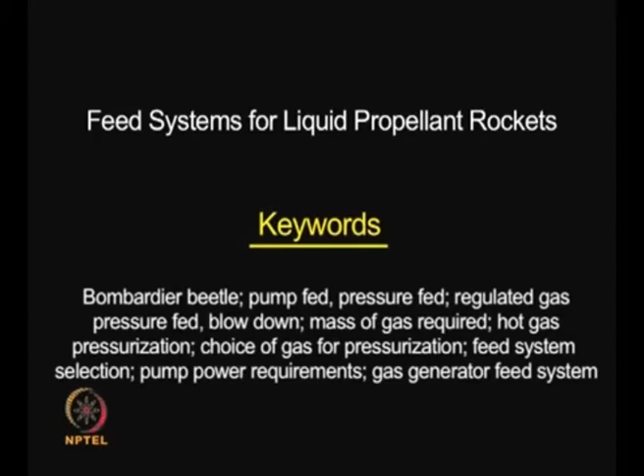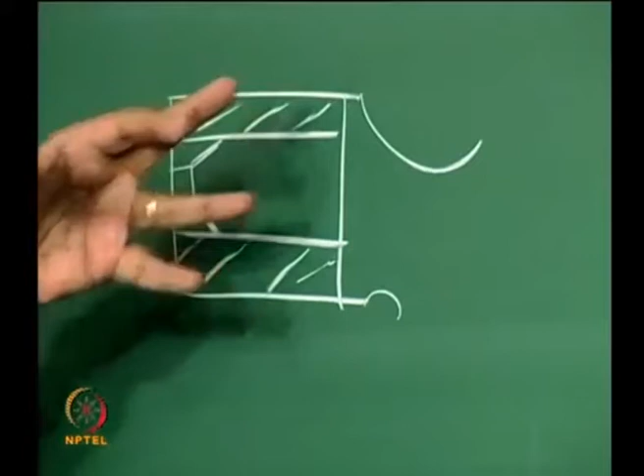When we discuss solid propellant rockets, we told ourselves, well, you have a solid propellant which burns, you have a flame near the surface, and once a solid propellant rocket begins to burn, it is impossible to extinguish it. This is because you have the grain in a case, and once you ignite it, there is no way you can quench it, it continues to burn. Of course, there are some works done to see under what conditions you can stop the burning, and by rapid depressurization you can quench it, but these have not reached a stage of application. Therefore, we say a solid propellant rocket, once it gets started, you cannot control it, it burns and burns, that is about it.

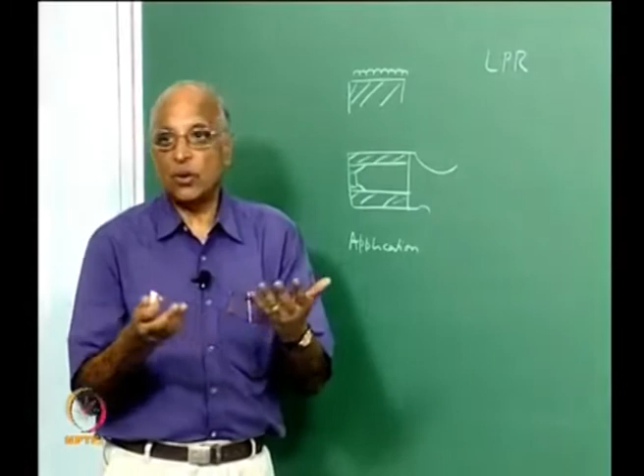Whereas when we talk of a liquid propellant rocket, we have considered different propellants. After all, I inject a propellant into it, I can always control it, and therefore there are certain advantages which a liquid propellant rocket will have. Let us examine these things, but to get started with liquid propellant rockets, I thought let us go ahead and look at nature.

We did examine, when we considered the theory of rocket propulsion, a small insect known as the bombardier beetle. This particular insect is smallish, maybe a centimeter to 2 centimeters or so, and it is somewhat heavy, and we find it all the time at all places. It is sort of unwieldy, it cannot fly that rapidly, and therefore it is always attacked by insects, and also it is harmless, it does not bite, it cannot fly much, we just pick it up on a piece of paper and throw it out whenever it comes. Some articles have come out on this bombardier beetle in the last 10 to 15 years, and one such article came in the Proceedings of the US National Academy of Sciences in 1997, volume 94, running over 5 pages from 1692 to 1697. The beauty of this is we must be familiar with what happens around us.

This particular bombardier beetle is attacked by ants, and what does the ant do? It stings us, and why do you feel a sting? It injects some formic acid into our system. Formic acid is something like carboxylic acid, and that is why you feel a sting, the same sting as when a bee stings us, because something is injected into us. In fact, the ant in Latin is known as formica because it bites us and injects the formic acid into us, and this same ant also pesters this beetle by stinging it. So what mechanism does this beetle have to escape from it or get rid of the ant?

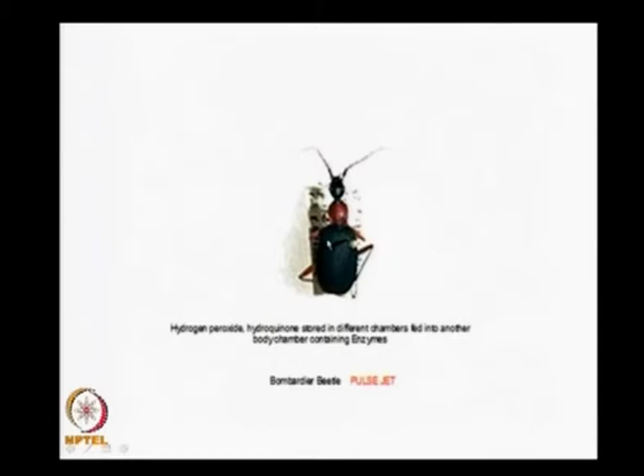It is a very unique way of evolution of species. All the species, if you look at Darwin's theory and all that, have come through some hierarchy, but this particular insect seems to be different from the other species, and it is very illustrative of something I will now tell you. Let us go ahead and see what really happens: in one stomach you create H2O2, hydrogen peroxide, and in the other chamber you create hydroquinone, which is a fuel.

When it wants to squirt hot gases out, it pushes this hydroquinone, this hydrogen peroxide, into this third chamber which is coated with enzyme, and it chemically reacts to form hot gases which it squirts out.

I was reminded of Leonardo da Vinci. He was the painter who lived in the late 15th century, and he made everything. He looked at birds flying, tried to construct an aeroplane, made bridges. Of course, he was a famous painter - you will remember the Mona Lisa painting.

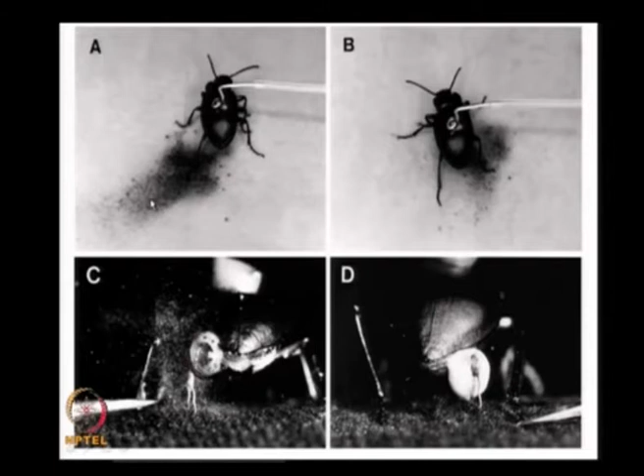And if you were to see what really happens, let us go back. This is again about squirting, this beetle. This is the prong or something like this. You are making it squirt out in this direction, maybe making it squirt hot gases in this direction, and so on. If you look at what this beetle does, maybe a chamber containing oxidizer, a chamber containing fuel, and a third chamber in which it reacts and forms hot gases and squirts it out.

A liquid propellant rocket consists just of fuel in a tank, an oxidizer in a tank. You pump the fuel and the oxidizer into a chamber, and how do you pump it? You pump it at high velocities through an injector, maybe break it up into fine droplets, vaporize it - all happening in that third chamber - then combustion takes place and you expand through the nozzle. This injector, combustion chamber and nozzle together create thrust, also known as the thrust chamber. So a liquid propellant rocket is nothing very much different from the bombardier beetle which is there in nature.

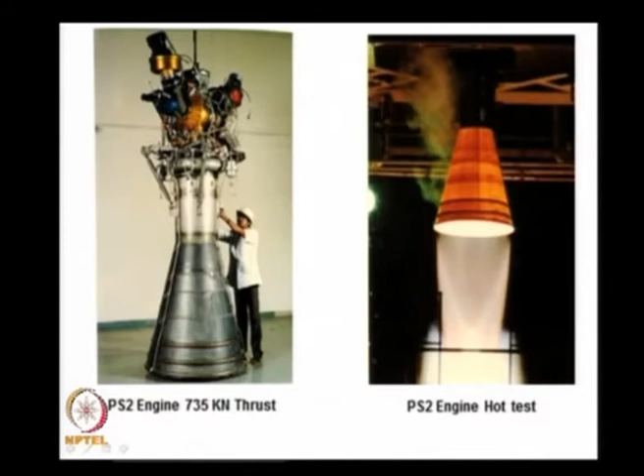I thought maybe we should look at a few more pictures of this. This is the engine I just showed you, a liquid propellant rocket engine, maybe much taller than this man over here. This is the combustion chamber, this is the pump, this is the nozzle, and this shows the rocket firing.

Let us take one more example. In this particular rocket which I just showed you, the oxidizer was N2O4 and the fuel was UDMH.

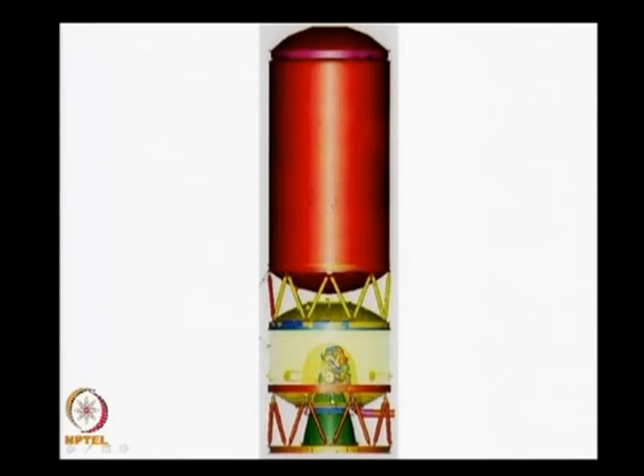The fuel could be liquid hydrogen, the oxidizer could be liquid oxygen. When I carry propellants like liquid oxygen and liquid hydrogen, liquid hydrogen is not very dense, so I have a huge tank for it, liquid oxygen in another, and a pump which pushes it into the combustion chamber where it burns. This is what a cryogenic liquid propellant rocket is like.

I will cover this particular rocket, known as the RL-10 engine. This was the first cryogenic engine developed, in the United States, during the 1960s.

So what do we infer from these few examples? In case of a liquid propellant rocket...

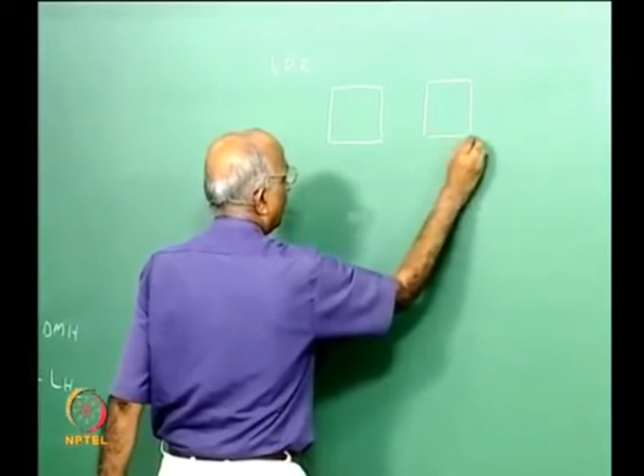All we need is something like a fuel tank, maybe an oxidizer tank, maybe a pump that takes a small incoming pressure and increases it to a high outgoing pressure—the incoming pressure should be even smaller, and the outgoing pressure much larger.

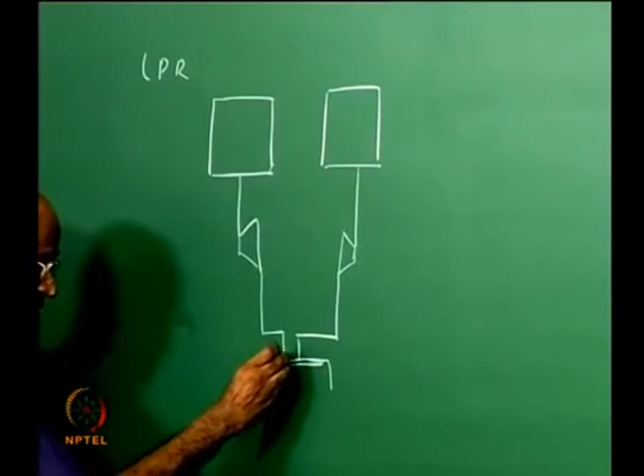I push it into a chamber, but I cannot just push it—I have to break it up into particulates. That means I need something like an injector, which allows the required quantity of propellants to come in and break into droplets. I have a chamber where the reaction takes place, and then this huge nozzle where I expand the gases. This becomes the liquid propellant rocket.

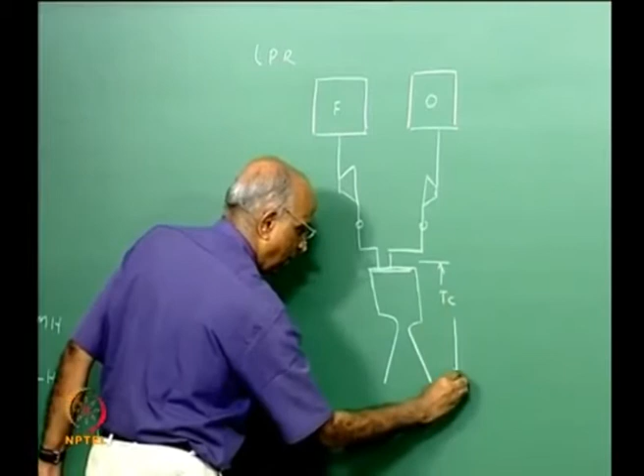Maybe I put some valves here to start the combustion and stop it whenever I want. Let's say the liquid fuel is here, the oxidizer here, and here is the thrust chamber where high pressure gases are formed and thrust begins to build up.

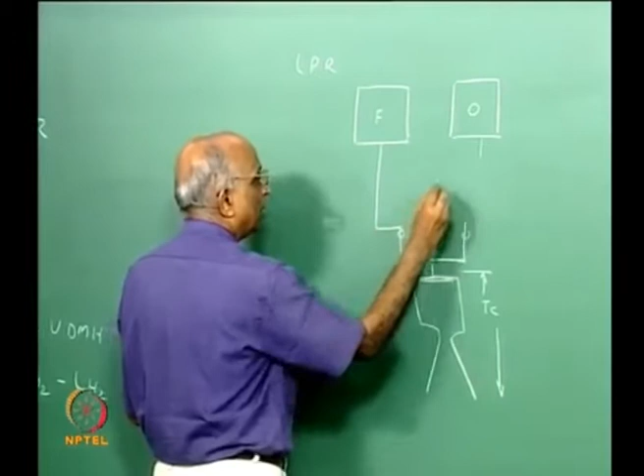Now you will immediately ask, why do I have to have pumps in the first place? After all, I have to supply the fuel—why not remove the pumps and supply it directly, like when we do an experiment using diesel combustion in an IC engine, with just an overhead tank on the wall connected directly to the engine?

Why not directly connect the fuel and oxidizer, and to push it through, have something like a gas bottle containing high pressure gases, with a pressure regulator over here to reduce the pressure and supply the gases at low pressure. In other words, I put a pressure regulator downstream of a high pressure source of gas.

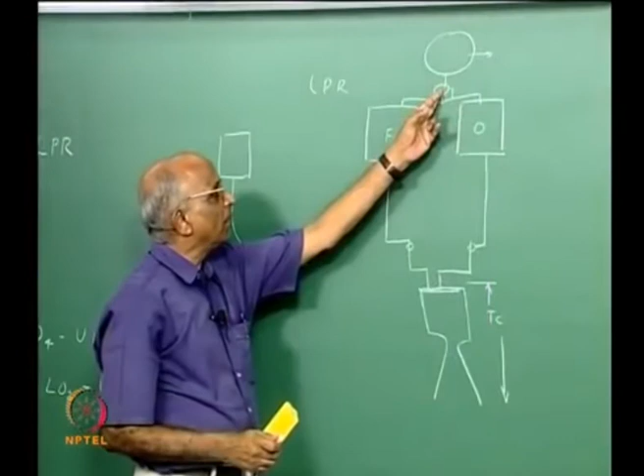Why do I have high pressure? Because then I can have a smaller gas bottle, and pressurize the fuel so that at high pressure I can send it into the chamber.

Therefore I need not always have a pump, but to understand whether pumps are really required, I need to do a little more exercise on this. Let us see what is required—let me replot this.

I tell myself I have something like a gas bottle which stores gas at high pressure, and a pressure regulator downstream. What does the pressure regulator do? From high pressure, maybe I store gas at 30 MPa, 300 to 400 bars, but I don't want such high pressure—I want much lower pressure, maybe 10 MPa or 1 MPa. So I put a pressure regulator which senses and reduces the pressure through a particular opening.

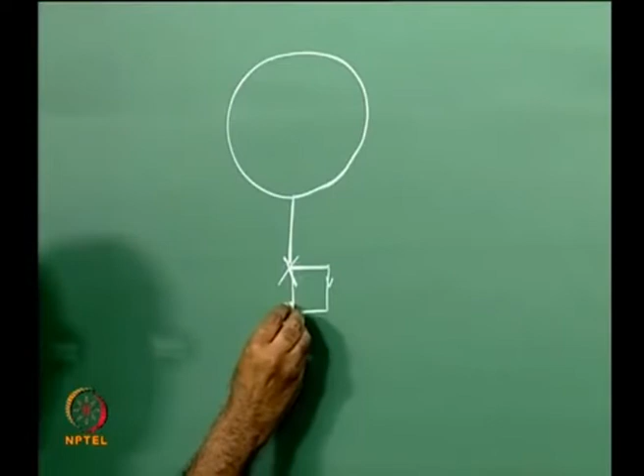It is a feedback control system, connected to sense the pressure, and then I connect this gas to the fuel tank and the oxidizer tank, which are full of propellants, and then bring it into the combustion chamber.

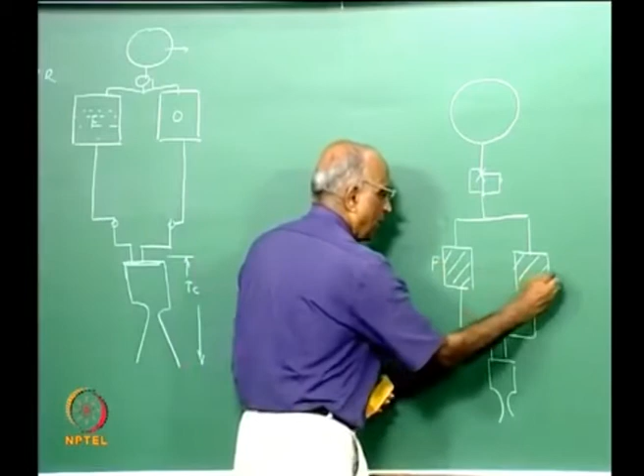What am I talking of? Having a high pressure gas bottle, I regulate the pressure to a lower value and push the fuel and oxidizer into the combustion chamber. This becomes something like using a cold gas, high pressure gas, and I call this a regulated gas pressure fed system.

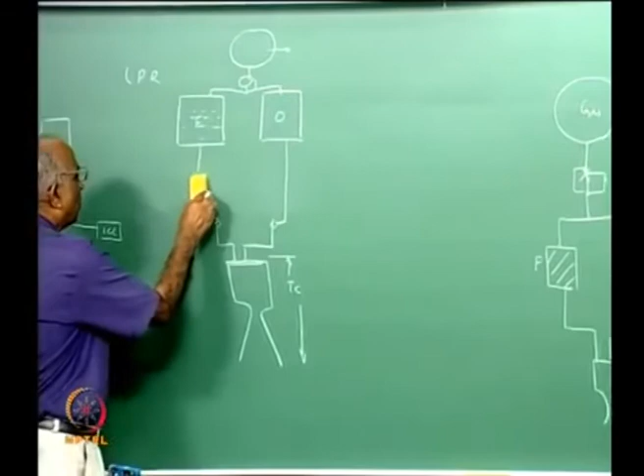That means I am interested in this. I started with a pump. Let us see under what conditions I would really require a pump, and under what conditions I can use a regulated pressure system. It is not always necessary to have a gas bottle and all that.

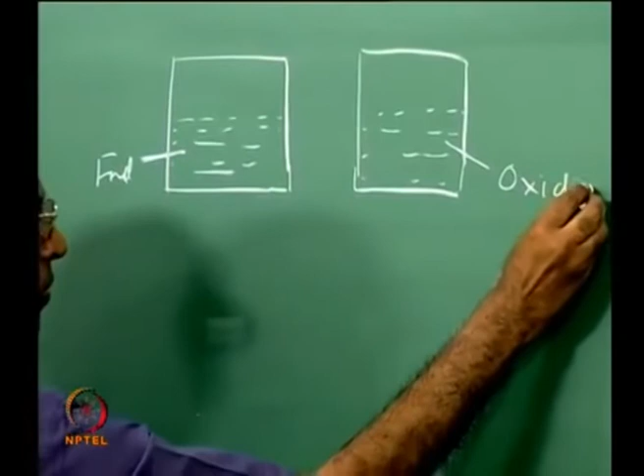I can think in terms of a different configuration wherein I take a tank, maybe a fuel tank, maybe an oxidizer tank. I don't fill the propellants fully in the tank. Let us say this is the fuel tank with liquid fuel, and I fill it with liquid oxidizer, and I directly bring it and supply it to the chamber. But how do I push it?

I fill gas over here, at maybe high pressure, and then I put a valve. I start this valve, immediately propellant flows. When I want to stop it, I close this valve. So the gas is contained in the tank itself and it blows the propellant into it. This is known as a blow down system.

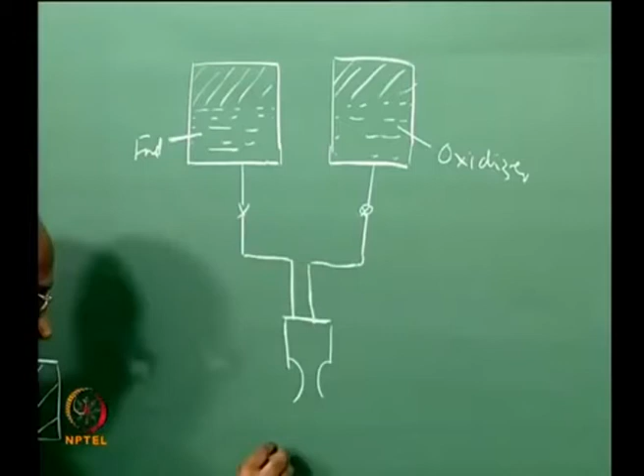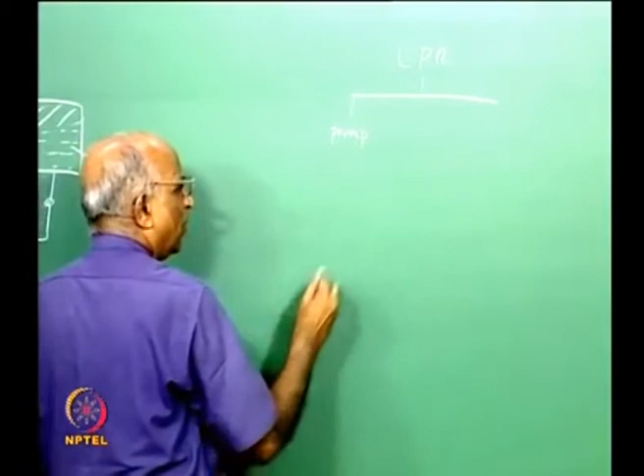What have I been talking of? In the case of liquid propellant rockets, we need to supply the propellants. We looked at a pump, but also told ourselves a cold gas at high pressure is possible.

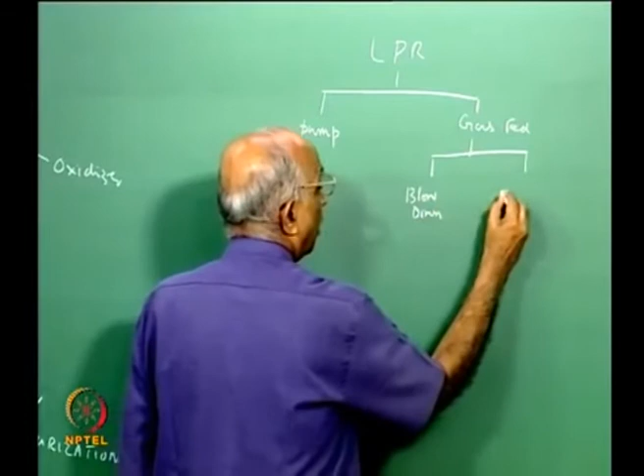This gas can be directly filled, and what happens when it blows down? The pressure keeps decreasing, and therefore the thrust keeps decreasing. Whereas if I give a regulated gas, I maintain constant pressure, and therefore I get constant thrust. So the gas fed system, high pressure gas fed, could either be in a blow down mode or in a regulated mode.

But we can't rule out that this is not required. For instance, if you have a satellite sitting in space, let us say the INSAT spacecraft - I will show you a small model of this satellite. It is something like a box structure, consisting of a box with solar sails, and when light falls on the solar sails, it creates pressure.

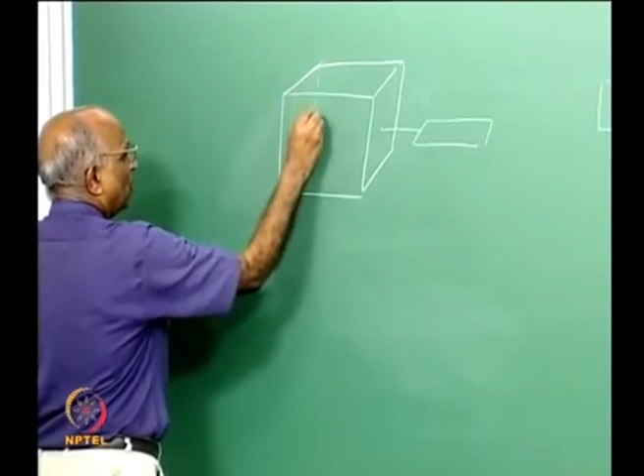We will study this method of propulsion towards the end of our classes. You have to balance the pressure from the sunlight falling on this, so you put something like a balance such that it does not get tilted. To control the attitude, we put small rockets on the different faces. How do you supply propellant to this?

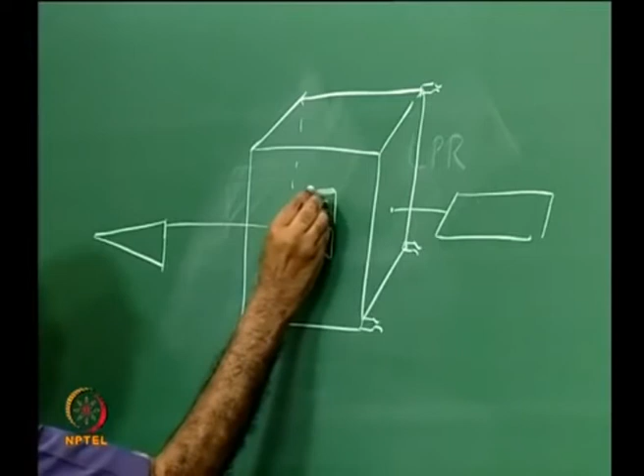Inside this structure, I put a propellant tank, an oxidizer tank. At the bottom of this oxidizer tank, I have a fuel tank, maybe with a common bulkhead - a single connection, this could be fuel, this could be oxidizer. I could put gas pressure connected through lines to this rocket, this rocket, and so on. Whenever I want this rocket, I open the valve and it fires.

This is the model I brought of this blow down mode, and this is how the INSAT spacecraft looks. This is the central box, inside which there is a chamber with the fuel tank and oxidizer tank, and these red knobs correspond to the thrusters, liquid propellant rockets. Whenever you want the rocket fired, you open the valve - the tank is already pressurized - and the liquid fuel and oxidizer flow into these thrusters and generate thrust. That is how you control it, and that is how liquid propellant rockets are used in spacecraft too.

But there is a problem.

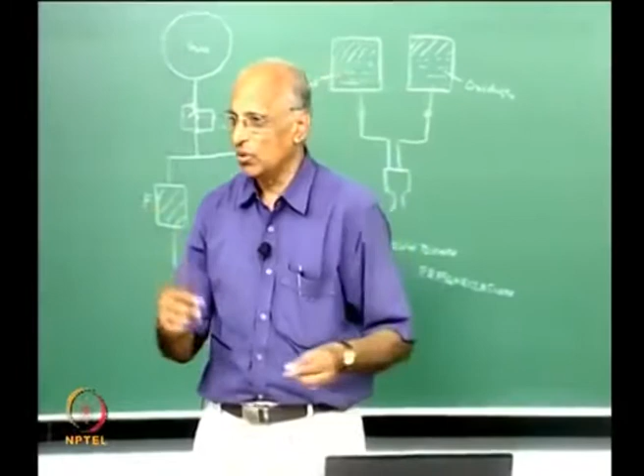Whenever I have fuel and oxidizer and a spacecraft is revolving around at a constant velocity, we told ourselves that in this frame of reference, it has a centrifugal force which is balanced by gravity. Therefore, there is no weight for this and it creates new problems. We have to see under weightlessness how do we supply the propellant. This also maybe we will take up after some time.

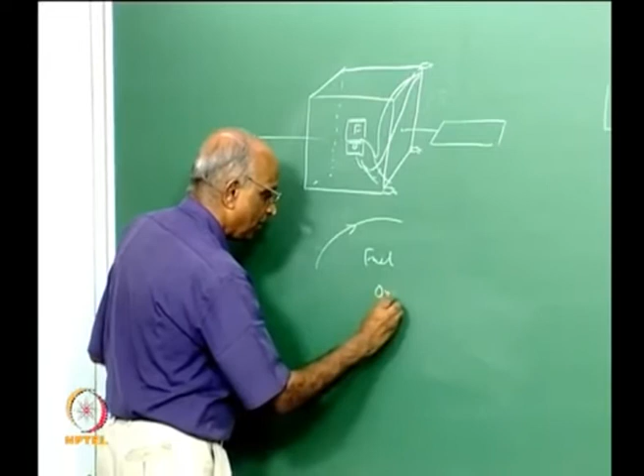This also requires that you have to supply fuel and oxidizer when they are in a state of weightlessness. That means if I put a propellant in a tank, the propellant may sit on top, it may not really come at the bottom, and when I pressurize it with a gas, the gas may come out but the liquid may not come out. Supplying propellants when in a state of weightlessness is again going to be a problem. Maybe we will take a look at it later.

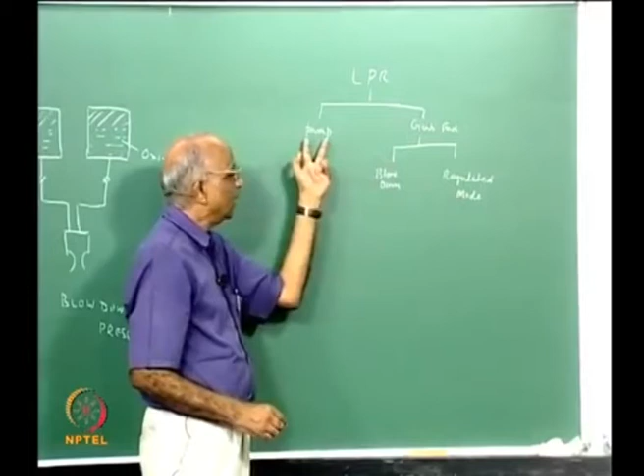Right now let us take a look at what constitutes a gas fed system, which could either be blow down mode or regulated mode, and then let us come back to the pump. Let us see if in between these two anything else is also there. To be able to do this, let us first try to find out how much high pressure gas is required.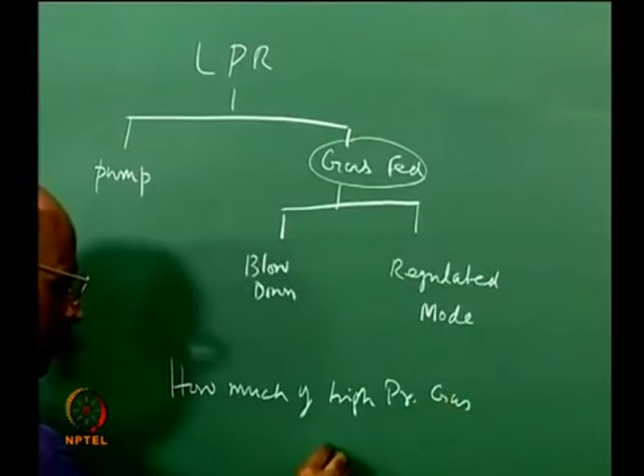First thing, we have to supply the propellants. I know once I give the thrust, I know what must be the mass flow rate of propellants. How do I calculate it out? Let us refresh ourselves again.

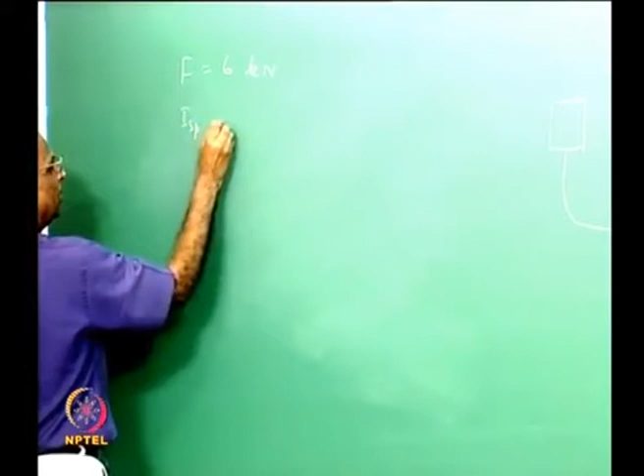Suppose the thrust of the rocket, as an example, is 6 kilonewton. Let us say the specific impulse of the rocket is equal to 3000 Newton second per kg. Then I know the mass flow rate of total propellants, fuel and oxidizer, is equal to 6000 Newton divided by 3000, which is equal to something like 2 kg per second.

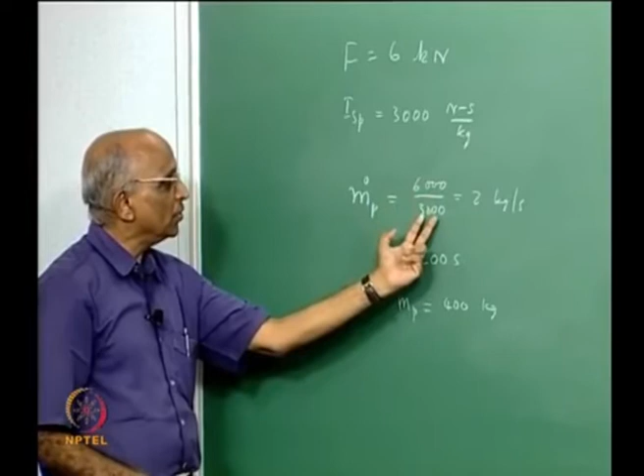To be able to supply this 2 kg per second, maybe the rocket has to fire for 200 seconds, let us take a small firing rocket for a small time of firing, say 200 seconds. Then I need to supply a total mass of something like 400 kg during the 200 seconds. We talk of 6 kilonewton, 6000 Newton, this is 3000 Newton second per kg, giving 2 kg per second. This is the total mass of propellant which has to be exhausted.

I want to know how much gas is required, how much mass of gas. Do I require 1 kg, do I require 100 kg? Because if the gas requirement is large, well, the rocket cannot take off. Let us try to estimate it. And how do we estimate it? We again follow the same figure, but now let us simplify it.

Let us simplify this figure and say, well, I have gas pressure, and we also told ourselves that gas can be stored at fairly high pressures. Let us plot it out. I have a gas bottle. It contains, let us say, M0 kilograms of air or gas, whatever is required.

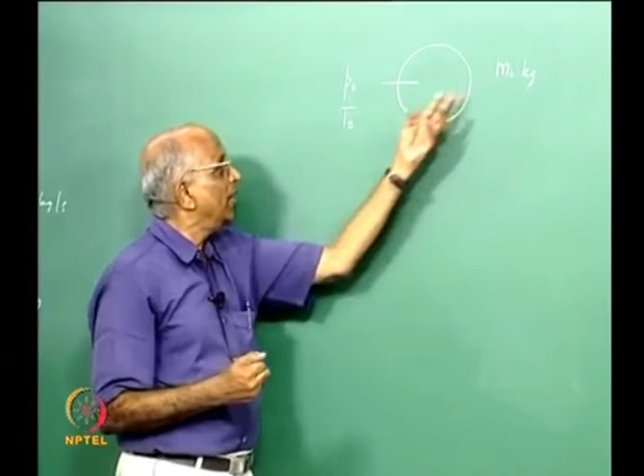I must also find out which gas will do my job well. Let us say it is at a high pressure P0 and at room temperature T0, because I do not want at this point to say I need a hot gas or a cold gas. Maybe when I derive the expression, it will become clear what type of gas is required and what must be the temperature of the gas.

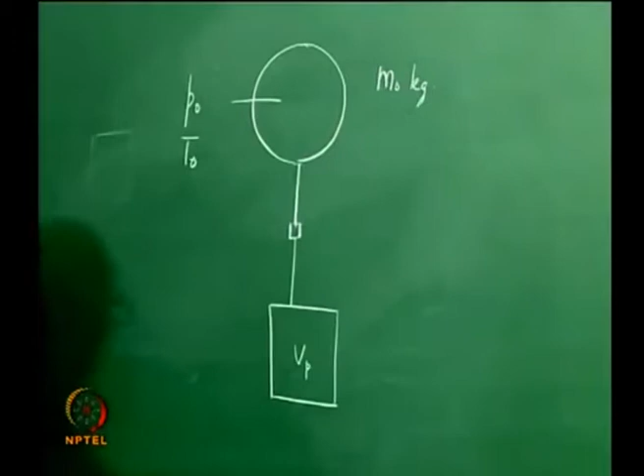What I do is from this high pressure source, I put a pressure regulator here and I reduce the pressure from the value of P0, and it must communicate to the two tanks I put together. Let us say the total volume of propellant is Vp, and this is what must be supplied to the thrust chamber over here. Let us say this is my surface of the thing, I need a pressure Pp over here, in Newton per meter square or Pascal, and I reduce the pressure from P0 to Pp in this type of regulator.

I reduce the pressure from P0 to the value Pp. Now my point is, how do I find out the value of M0 kg? I think it is a straightforward thermodynamic problem, but before doing this, we also need to put some other things down. Let us do a general problem.

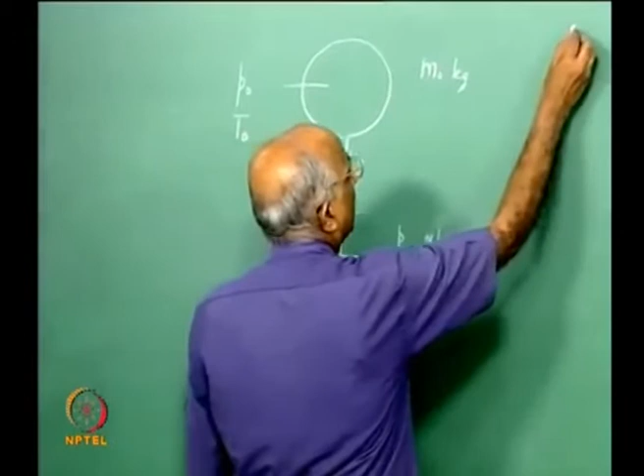Let us say at this point in time, when I start the work, I have the quantity of propellant liquid available which is Vp. When I finish my exercise, the quantity of gas available is going to be, since I use some gas for pressurization. At the end of operation, let us say MR is left, reduced so much kg, and the temperature here is TR, the pressure is PR, and at the end of it I have the same system, the same tank, all the propellants are expelled, it is now gas.

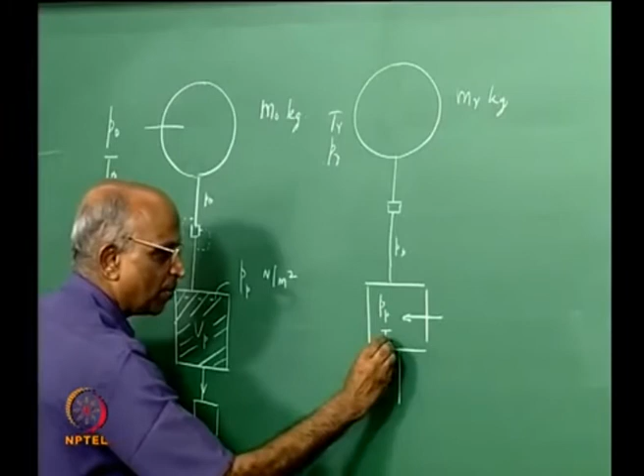Since I'm through the regulator, since I have reduced the pressure to Pp, when the propellant has just got out, it will be filled with gas at a pressure Pp, and the temperature, since it is slow depletion or fast depletion, it reaches the temperature of the propellant, the temperature will be Tp.

In other words, this is my initial condition. Let me make the figure complete. What I am telling is, I have exhausted or pushed out a volume of propellant Vp, and now after pushing it out, the gas has expanded and occupied this volume in addition to this volume, and this is my final condition.

I want to write an equation and determine the value of m0 kg that is required. How do I do this problem? Maybe we have done such problems in our thermodynamics subjects earlier. Let's just try to write an equation for it and try to determine the value of m0.

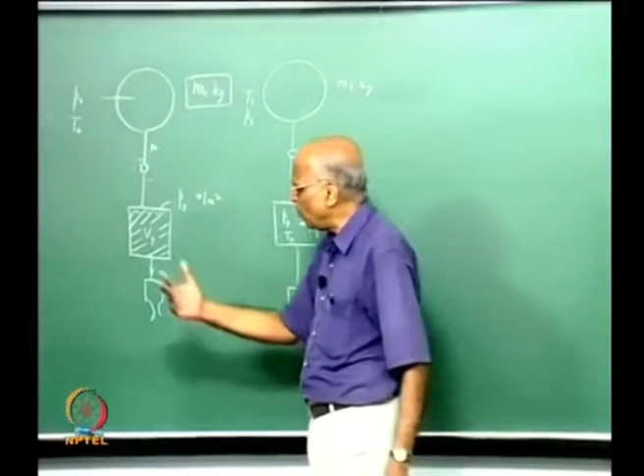I want to ask you, what is this which is happening? Let's say the system does not have any heat transfer. Let's make an assumption that the tanks are fairly insulated, the gas bottle is insulated, there is no heat transfer taking place, and therefore I ask myself, what is the work done by the gas in pushing out a volume Vp of the propellants? Let's calculate Vp for this particular problem.

Vp, if I take the density of the propellant to be same as water, density equal to 1000 kg per meter cube, that is the density of water, 1 gram per cc, and therefore the volume Vp is going to be 400 divided by 1000 meter cube, which is equal to 0.4 meter cube. In other words, for this rocket I have to get rid of 0.4 meter cube at a given value of pressure.

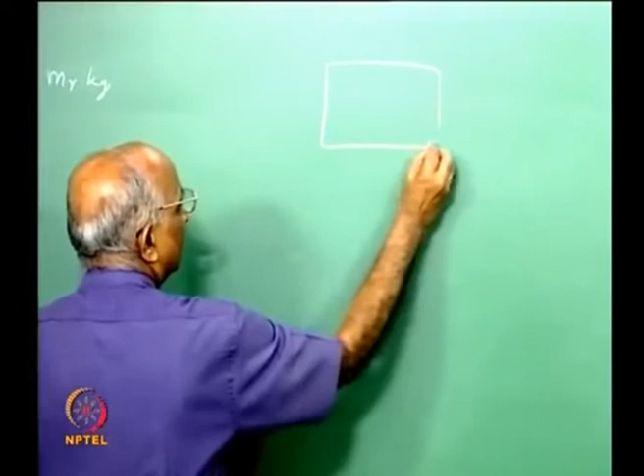Now, before I complete that problem, let's try to generate an expression and see what is the value. We tell ourselves, supposing I have a system like this. This is my initial state of my gas. The final state of my system is this, in which the gas has come from here and moved over here.

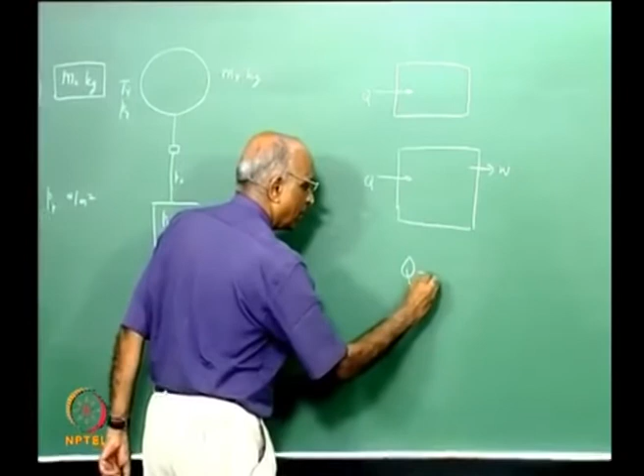I tell myself Q is adiabatic, well Q is there, the system does some work at the boundaries, then I can write Q minus W is equal to the change in internal energy for a system. Something is getting in, some work is being done, and the change is what is the internal energy. Therefore, now I take an adiabatic system, Q is 0, I need to find out the value of W, and I need to find out the value of change in internal energy.

Let us write the expressions for these two. The work done by the gas is in expelling the liquids, and therefore what is the value of work? Can we say, well, I have a constant pressure which is applied, the displacement is Vp, the work done is equal to Pp, the pressure, into volume of the liquid. Is it okay? What is the change in internal energy, final minus initial?

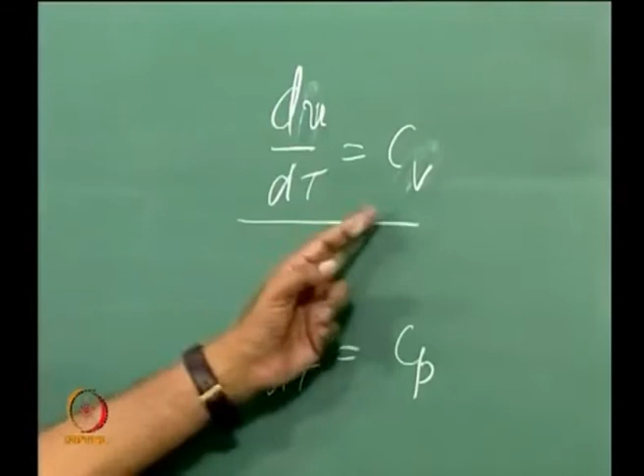Well, finally I am left with Mr of the gas. We know that du by dt, let us put it down, is equal to Cv, where U is the specific internal energy, and dH by dt is equal to Cp. Well, we are talking of internal energy, therefore U is equal to Cv T, and therefore du is equal to the final gas Mr which is available, into Cv into Tr. This is the final mass which is available. We say it is at a reduced pressure and a reduced temperature because it has expanded.

Some gas comes over here, plus I have gas which is there Mp into Cv into T, this is the final value of internal energy. I say that this volume of the lines or plumb lines are much smaller than this and this, therefore I neglect it. And what is the value of the initial internal energy? Minus, yes, you could tell me.

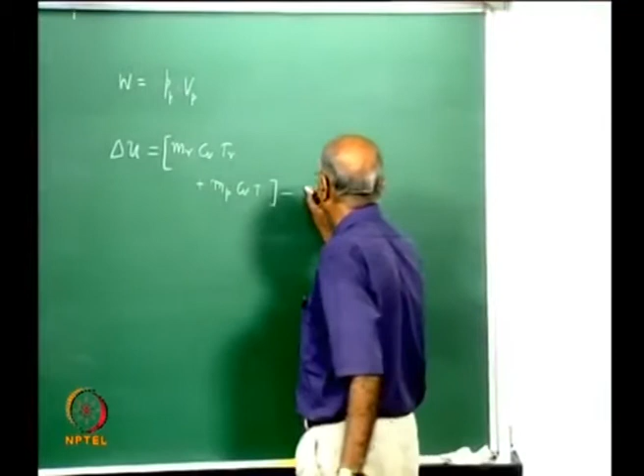What will be the initial value? Yes, m0 into Cv into initial temperature. I need to solve this equation and find this out, after knowing that minus W is equal to delta U. Let's find that value.

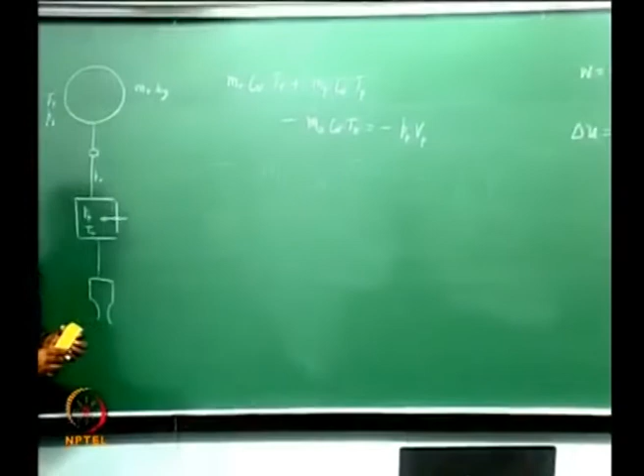Let me use this part of the board. What I have: MR into Cv into TR, plus MP into Cv into TP, the temperature of the final propellants should have been TP over here, minus M0 Cv into T0 is equal to minus W minus PP into VP over here. Is it all right? Q minus W is equal to the change in internal energy.

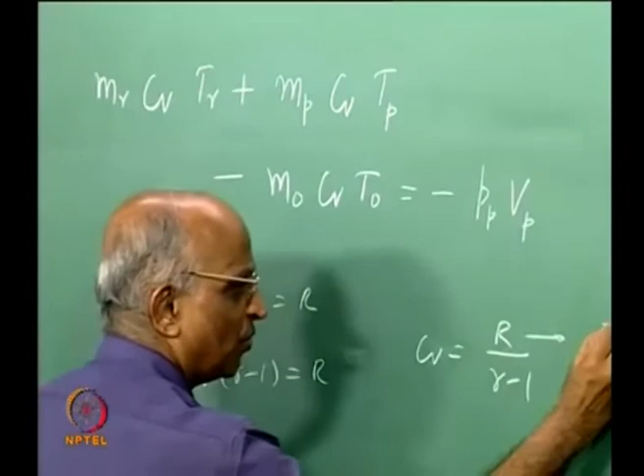I want to solve this. To be able to solve this, let us see what Cv is. We know Cp minus Cv is equal to R, and therefore Cv into gamma minus 1 is equal to R, or rather Cv is equal to specific gas constant divided by gamma minus 1, where R is the specific gas constant, has units of joule per kilogram Kelvin. And Cv therefore has units of again joule per kilogram Kelvin.

Now, what is the value of MR from the gas equation? We have PR into V0, that is the volume of the tank, is equal to MR into R into TR, or rather I can write the value of the mass, final mass after expansion has taken place in the tank, the mass of gas in the tank, is equal to PR into V0 divided by R into TR.

Is it all right? Similarly, I can write an expression for MP, and what will MP come out to be? MP should be equal to PP into VP divided by R into TP over here. I need to find the value of M0, therefore let us not touch this. Let us substitute these two values of MR, MP and the value of Cv in this expression and try to get the value of M0 coming out.

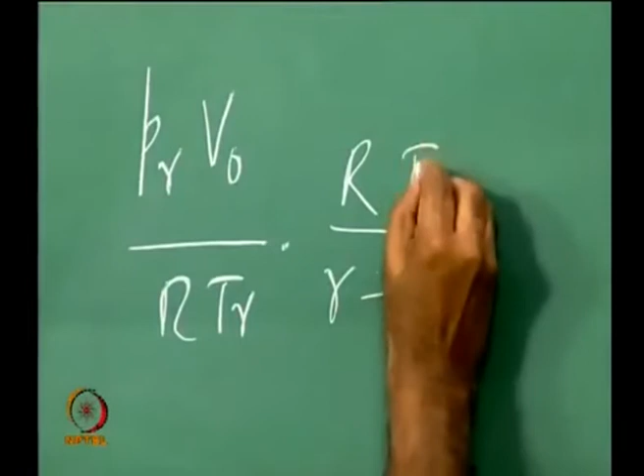Let us say MR is equal to PR into V0 divided by RTR, and Cv was equal to R divided by gamma minus 1, into TR, plus similarly I get PP VP by RTP into R, again I get the value of TP divided by gamma minus 1, minus I get the value of M0 into R divided by gamma minus 1 into the value of T0 over here, this is equal to minus PP into VP over here.

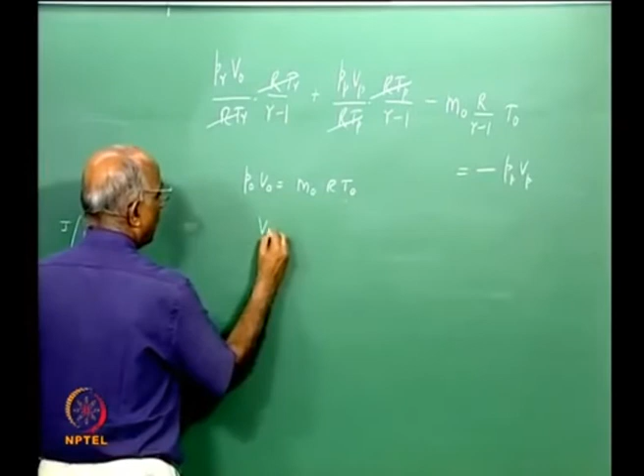Is it all right? Now I find that RTR cancels, RTP cancels, and now if I were to simplify, I don't know the value of volume because volume is related to mass. I can write P0 V0, that is the initial condition of gas before starting over here, is equal to M0 into RT0, or rather I can write the value of V0 as equal to M0 into R T0 by P0.

I substitute this expression, since volume is equal to mass into RT divided by P over here. I substitute it over here, take gamma minus 1 on the right hand side because all three terms have gamma minus 1, and therefore I get m0 into RT0 into PR by P0, plus PP into VP over here, minus I get m0 into RT0 divided by gamma minus 1, is equal to minus PP VP divided by gamma minus 1. This right hand side now reduces to minus gamma PP VP minus PP VP, plus, because minus and minus becomes plus, therefore immediately this and this get struck off, and now we are able to get an expression for m0.

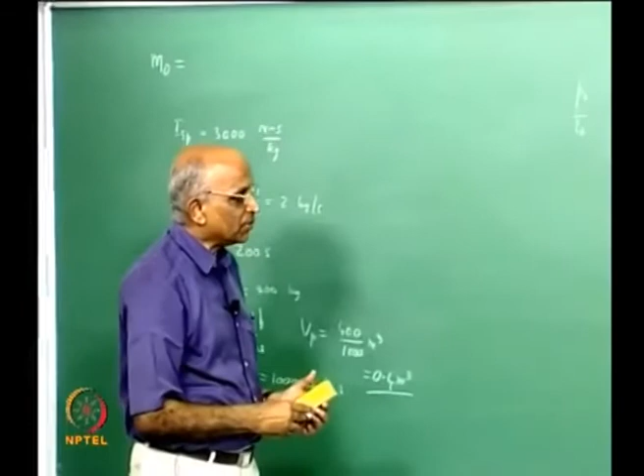Let us put it over here. Let us collect the similar terms. I get RT0 which will come at the denominator. I have in the numerator the value gamma on the right hand side. Therefore, what do we read? Gamma PP VP into 1 minus the value of PR by P0.

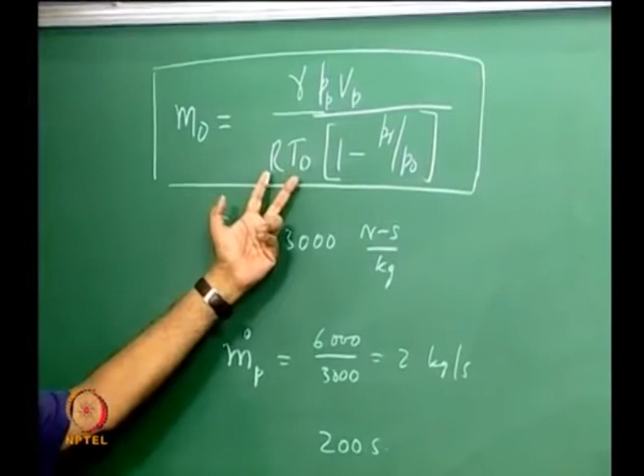Now I want to examine how much is this gas, what is this expression. Whenever we derive an expression, we must take a look and see under what conditions this holds good. Let's do that, I don't need this anymore.

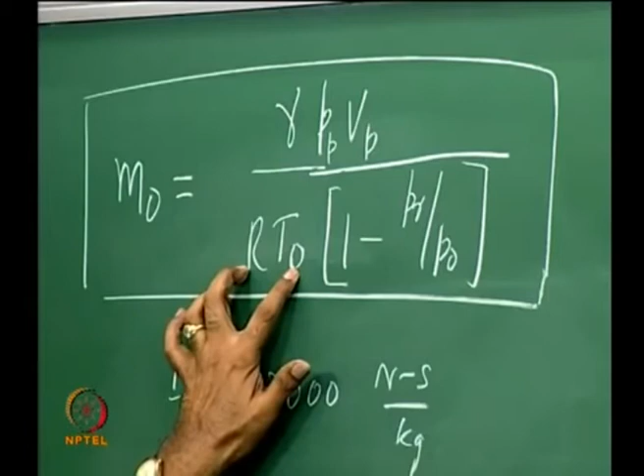Say the process had been isothermal, what gas would I require? M0 would equal PPVP by RT0, because it is isothermal. So when the gas is expanding, and irreversibly so, under isothermal expansion I get PPVP by RT0, with an amplification factor of 1 minus PR by P0 due to the expansion process. I'm writing the same thing, PPVP by RT0, because M equals PV by RT0 isothermal, and this is the multiplication factor.

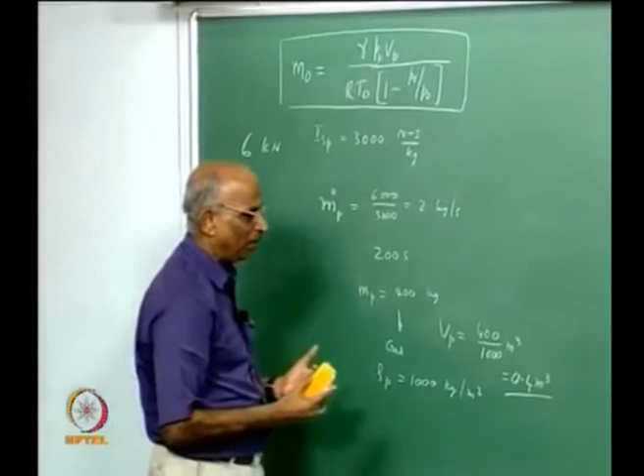Now I want to find out, for this engine which we said is 6 kilonewton, the mass of the gas required. Let's do one example and then extend it for different pressures and different thrust. Let's say in this case the volume equals 0.4 meter cube.

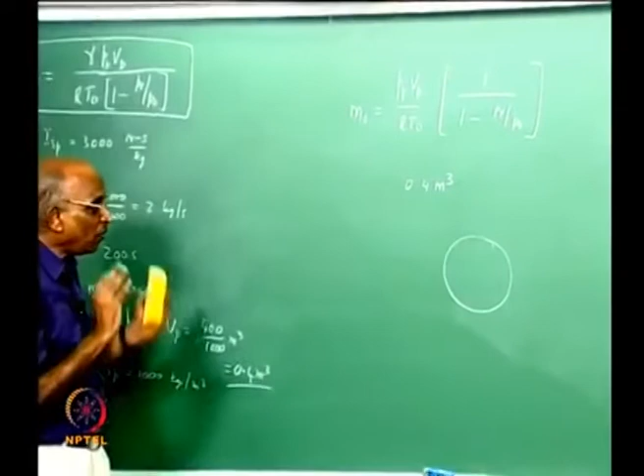Now how much gas do I require? Will this expression also tell me the type of gas I require? Do I require a light gas or a heavy gas? What does this expression tell me? Can we infer something from this? Should I pressurize the initial volume with a high molecular mass gas, a low molecular mass gas, or at a high temperature? Under what conditions should I do this? All I can tell you is the value of P0 is limited.

Because I need a gas bottle which can hold a certain pressure, and that pressure cannot be greater than around 300 to 400 bar, because beyond that, making something hold such high pressure gas is difficult. So normally P0 is around 30 to 40 MPa. This is bar, right? Now all I know is P0.

How can I choose the other parameters like gamma, R and so on? Does it tell me what type of gas is required? Let's do one more exercise.

Let's say R equals universal gas constant divided by molecular mass, 8.314 by molecular mass. If the molecular mass of the gas is smaller, I get a very large value of R. If I get a large value of R, I can have a smaller mass of gas. Therefore, this immediately tells me the lighter the gas, the better. Hydrogen is the lightest, whereas helium has a molecular mass of 4 grams per mole. Therefore, I would invariably like to choose helium, which is a light gas, for my purpose.

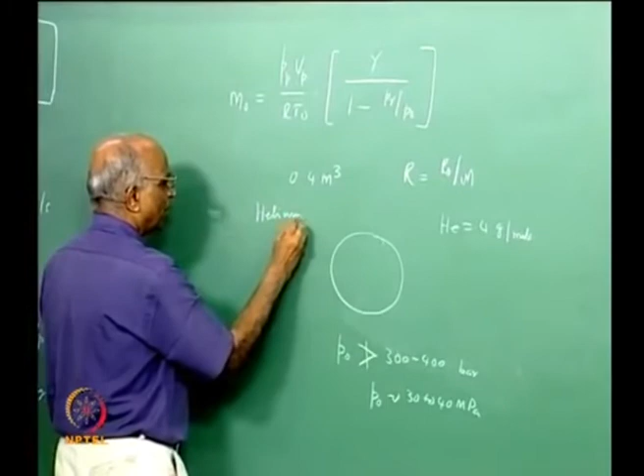See, the expression is able to tell us what we're looking for. This is one factor. Second, helium has a large value of gamma, 1.67, compared to air's 1.4, but while gamma is 1.67, R could be something like 4 to 28, 7 times larger. Therefore gamma is not that important, R is more important, and so I choose a light gas for pressurization.

But this expression also tells me a higher temperature is suited, because higher temperature means a smaller mass of gas. So rather than choosing a cold gas for pressurization as we initially said, why not use a hot gas? Why not have some reactions taking place in the combustion chamber to do this?

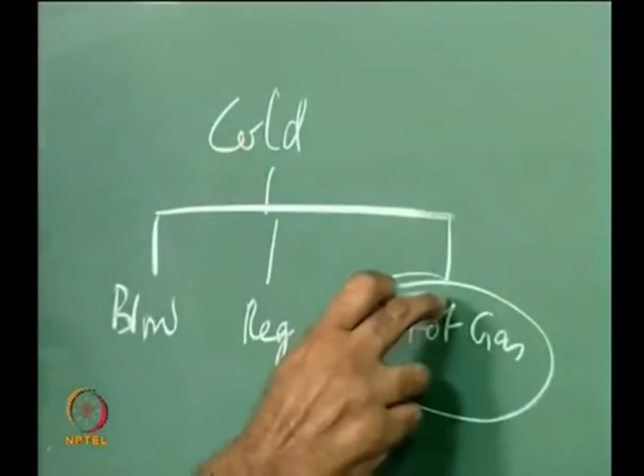Therefore, in addition to cold gas, I could have blow-down mode, I could have regulated mode, and it's also possible to have hot gas, and hot gas is more efficient. But in practice it has been difficult. Several countries have tried it, but it hasn't yet found an application. I think we should keep this in mind, as in future this will be a strong contender for a gas pressurized system.

Having said that, let's do a small numerical problem to see the amount of gas, so we have some feel for whether I need 1 kilogram or a few grams. Let's say for this rocket, requiring a Vp of 0.4 meter cube, the chamber pressure is small, say 1 megapascal. If the chamber pressure is 1 megapascal, I have to force propellant into it, so let's say Pp equals 1.2 MPa.

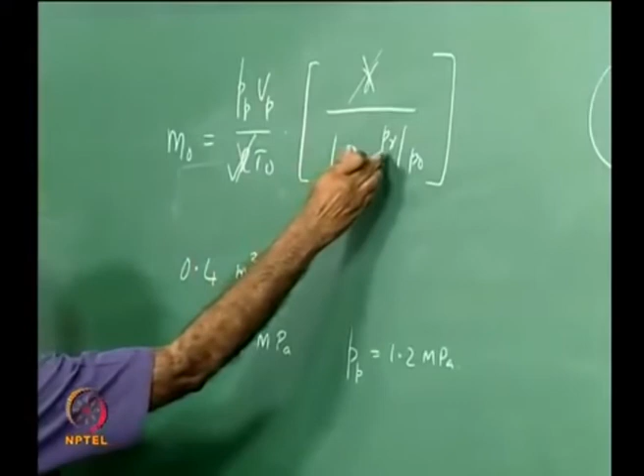Therefore, I say yes, the final pressure, the lowest PR, is equal to the supply pressure. The volume is known, and R for the gas helium is equal to 8.314 divided by 0.004, so much joules per kilogram Kelvin.

This is known, and I can calculate the value of mass. For this particular thrust, when the supply pressure is 1.2 MPa, the mass works out to be something like 1.34 kg.

Now I want to slightly change it. I have the same rocket developing 6 kilonewton, but the chamber pressure, instead of being 10 bar or 1 megapascal, is now changed to 10 MPa, and the supply pressure becomes 12 MPa. Therefore the quantity of gas becomes directly 10 times, that is something like 13.4 kg.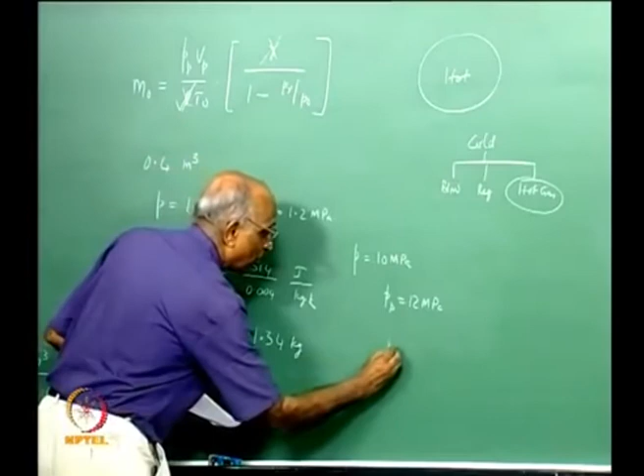Now if I talk in terms of a thrust which is much larger, maybe 600 kilonewton, the quantity of gas will be very much larger. Maybe you should try this as an example, but let me summarize it through slides.

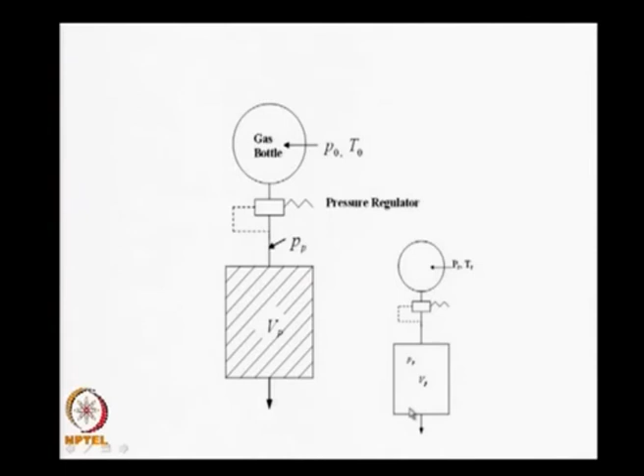In the next series of slides, this is what we said as a regulated pressure system, and this is something like a blow down system, and we wanted to find the gas. We had the gas bottle, the regulator, oxidizer and fuel supply, and we simplified it. This is the initial condition, this is the final condition, and we derived: mass of the gas required is equal to Pp Vp by RT0, gamma by 1 minus PR by P0. Then we found out that hot gas pressurization is an option, and now we calculate the value.

When I have a low pressure engine of thrust 6 kilonewton, the chamber pressure is 1 MPa, the supply pressure is 1.2, the mass of gas required is 1.34 kg. When the same 6 kilonewton is operated at a high pressure of 10 MPa, the supply pressure is 12 MPa, the mass of gas becomes, instead of 1.34, I should have written 21.4, maybe somewhere this factor I had removed.

Therefore it is not 1.34, but it is 21.4. Maybe you all should check it at home.

You see, when the chamber pressure increases by 10, the quantity of gas increases by almost 20 times, whereas if I have a high thrust engine of 600 kilonewton, at the same pressure value the quantity of gas required is something like 2000 kg, and it is not humanly possible to carry such amounts of gas in a rocket.

That is where it becomes necessary for us to have something like a pump which can supply the propellants, and that is why the necessity of a pump arises. Now if you were to go back and compare the different systems, we talked of a blow down, a stored gas, and a hot gas system.

We find when the thrust is small and the burning time is small, I can manage to have a blow down system like what was used in our INSAT spacecraft, because I need very small thrust, operating at low chamber pressure.

When I want to operate at slightly larger time and slightly larger thrust, maybe something like a regulated gas system is required, but if I want still better, maybe a hot gas system. But beyond some thrust and some burning time, I need to operate in a region which can only be done using a turbo pump or a pump system. So what have we been telling ourselves so far?

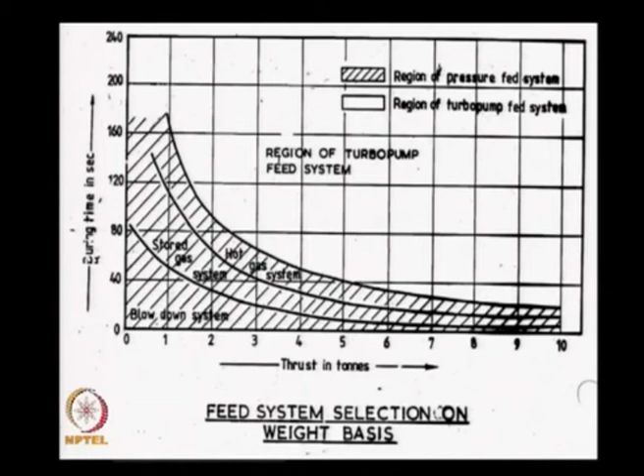We said the feed system could consist of different possibilities: we could have cold gas pressurization, that means a gas bottle containing gas, or something like a hot gas system.

The cold gas could either be in a blow down mode or in a regulated mode, but if the rocket fires for a longer duration and if the thrust or chamber pressure is large, I essentially need a pump to take the fuel from the tank into the chamber, and this is what we must remember.

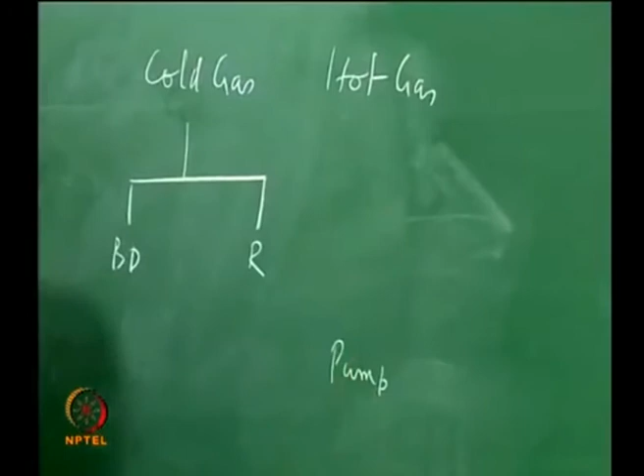So what is it we do? Maybe I need a pump system. Now let us go back and calculate the power of the pump which we require in this case. Let us do that small exercise using the same numbers we had.

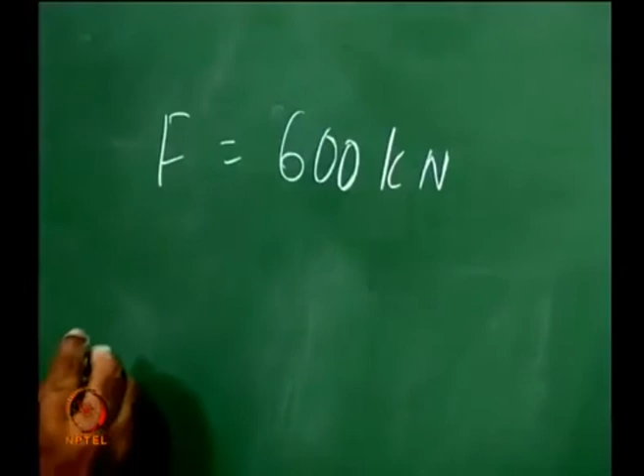Let us take this example. The thrust of the engine is equal to, let us say, 600 kilonewton. This is how that engine was, I showed you, UDMH-N2O4, has a thrust of around 600 kilonewton, and I say the specific impulse is equal to 3000 Newton-second per kilogram. Therefore my mass flow rate of propellant is equal to something like 200 kg per second.

Keep these numbers, let's have some familiarity for numbers, because we must be able to think in terms of numbers. 600,000 divided by 3000 is equal to 200, therefore I have 200 kg per second. Therefore if I have to supply this, let us again take the density as the same density of water. Therefore the rate at which the volume has to go is something like 200 divided by 1000 meter cube per second, which is equal to 0.2 meter cube per second.

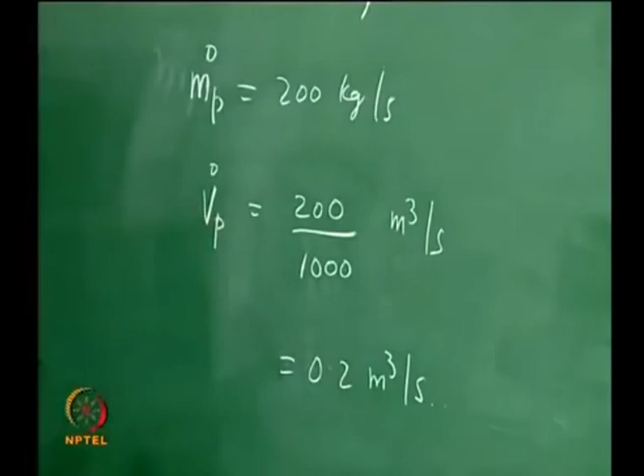What is the power required for a pump to supply 0.2 meter cube per second at a given pressure? Let us take the same value of pressure, let us say it has to supply at a pressure of 12 megapascal, because the chamber pressure I am talking in terms of 100 bar, the chamber pressure is 10 MPa. What is the work to be done by the pump which is to supply flow rate of 0.2 meter cube per second at a pressure of 12 MPa?

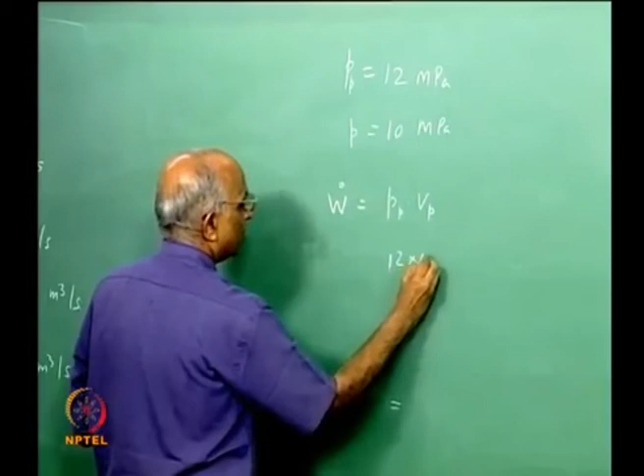Work done, rate of work done is equal to Pp into Vp, and this comes out to be - let us calculate - 12 into 10 to the power 6 into Vp, which is 0.2 meter cube, that is equal to 2.4 megajoule per second, which is equal to so much megawatts.

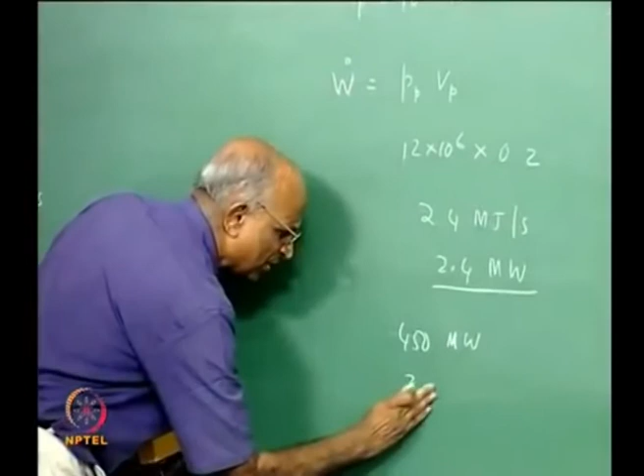Can we have some feel for this number? The power produced in the Ennore plant, which supplies entire electricity to Chennai, is something like 450 megawatt. If we take a super thermal power plant like Ramagundam, it has something like 2400 or 2600 megawatt. That means the power we are talking is enormous.

I cannot have a battery or an electrical power which is doing it, and therefore what we normally do is we need something like a gas generator which can supply work to a turbine, and using the turbine I drive the pump, and therefore it becomes a pump and a turbine, and it is known as a turbo pump.

I require another gas source, but to have a dedicated gas source is going to be a problem, and therefore what we do is we take the fuel, we take the oxidizer, we pump it, I remove some fuel from the fuel line, I remove some oxidizer from the line, I burn these gases separately, generate hot gases, supply these hot gases into your turbine, generate work which drives the fuel pump and oxidizer pump and supplies it to the chamber, and the exhaust from the turbine is left out.

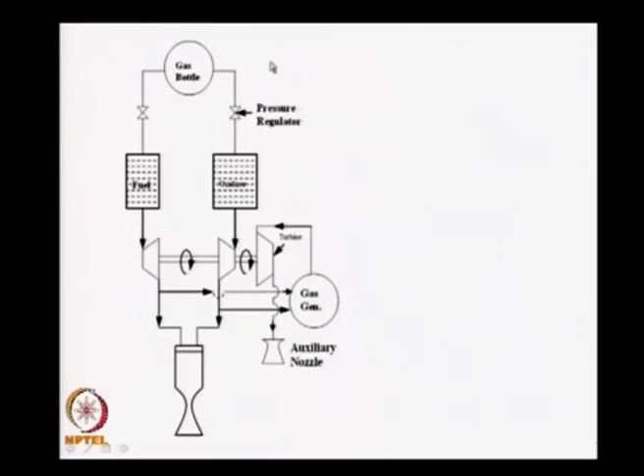This is an auxiliary nozzle, which means part of the fuel is used in generating high temperature gases, not very high because a turbine cannot take very high temperatures, and therefore you leave it to the ambient, and this becomes what is known as a gas generator cycle. That means I have a pump which is supplied gas through a gas generator, and such type of a feed system is known as a gas generator cycle for feeding propellants.

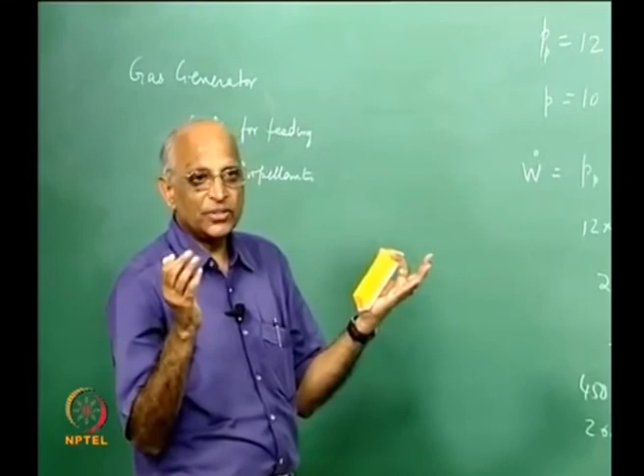I think I will stop here, but all what we did in today's class is we looked at that beetle and said, well, a liquid propellant rocket is quite similar to that. We talked in terms of cold gas pressurization consisting of blow down, regulated, maybe hot gas pressurization, and then found maybe when my duration of the rocket is little large and my thrust is large or my chamber pressure is large, it is just not humanly possible to carry such huge masses of gas which are required. I need a pump, but then we found a pump demands huge amount of energy, I wanted a gas generator, and this is what we call as a gas generator cycle.

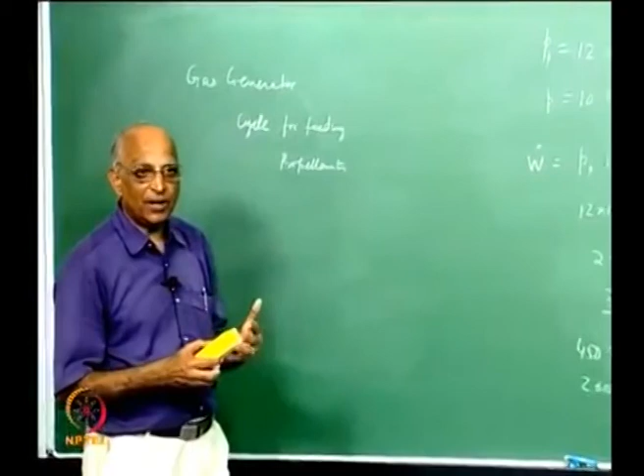In the next class we will advance ourselves, we will see what are the other cycles which we can use and calculate what is the performance of a rocket corresponding to those cycles. And then we will go to the components of a rocket. Well, thank you then, I think that is about it.